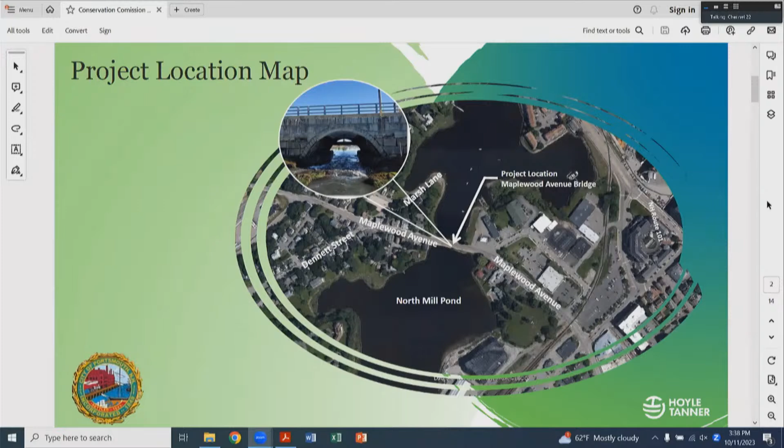Good afternoon. Again, my name is Kimberly Peace, and I'm with Hoyle Tanner and Associates, the design and permitting consultants for this project. If you'll go to the next slide - this is just a location map to orient everyone where the Maplewood Avenue Bridge is. It's oriented north and south, and it crosses the North Mill Pond.

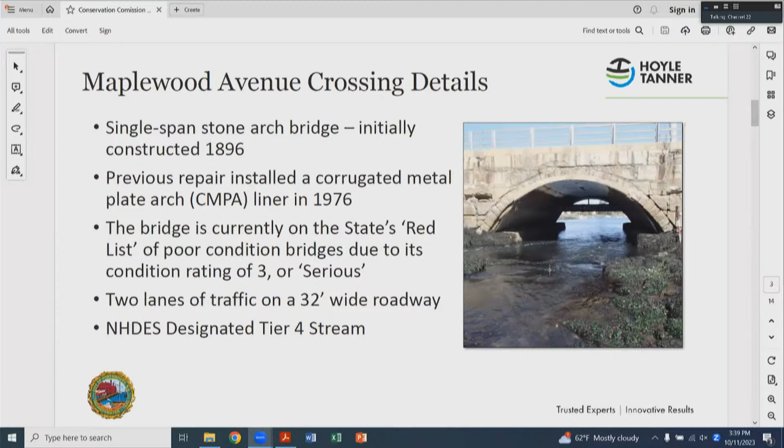Next slide. So a lot of words on here - basically what we're looking at is installing a geopolymer liner, spray applied on the inside of that metal arch. That is going to give some structural stability to the arch, and help that wall become more stabilized so we get some design life out of it. I believe we're talking about a 10 to 15 year design life, at which time we're looking at a complete replacement. So that gives the city some time to find the funding for that.

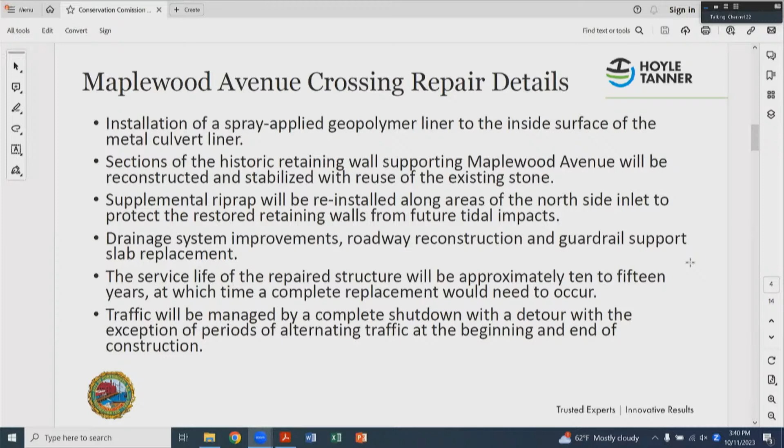There are also some sections of the retaining wall and supplemental riprap that are going to be repaired in order to add to the stability of the structure. So drainage system improvements, guardrail support, slab replacement - if you've been out there, you saw the guardrails are kind of tipped. All of this is in general just a rehabilitation of the structure so we can improve it for the next 10 to 15 years. This is going to be a complete shutdown with a detour, alternating traffic at the beginning and end of the construction periods.

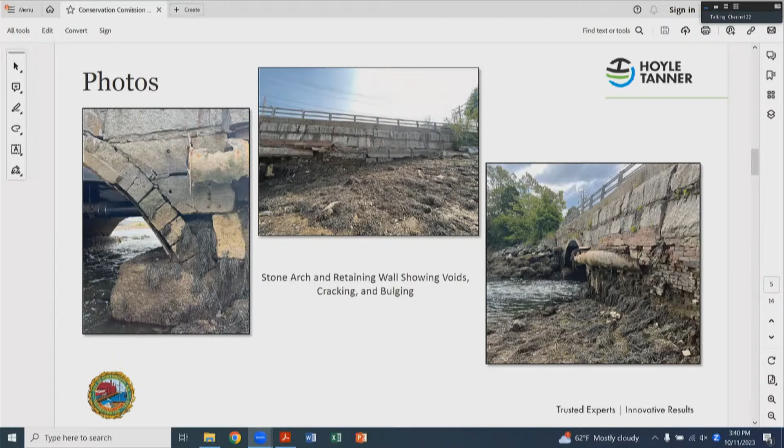Next slide. For some of you that were out there, this is the situation we're looking at in terms of replacement of stone along those areas where the stone has just shifted over time. And then the next slide, the pictures from within the arch, I think tells the story. This is really the repair we're looking at, that the geopolymer liner is going to go over and support, so that this metal plate arch is supported and stabilized.

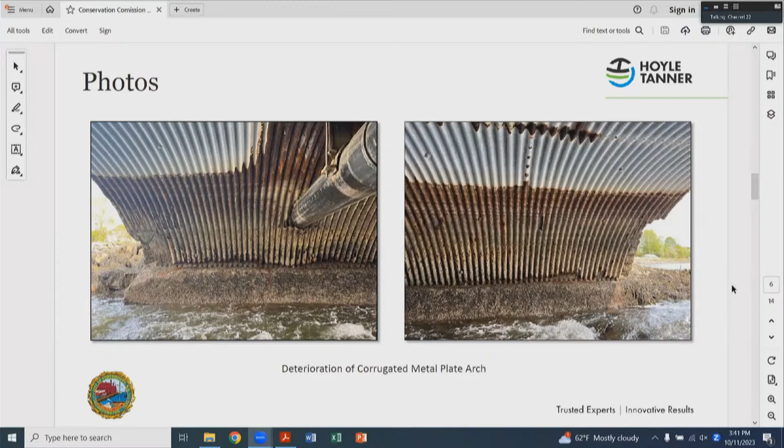In terms of environmental resource review, we did not have state listed species from NHB or Fish and Game, or federally listed northern long-eared bat. We don't have tree removals for this project. There were some invasive species, and they will have to do a control plan for the contractor.

Cultural Resources took a look at the bridge, even though it's structurally an old bridge, because of this work it's not going to have an adverse effect to the structure.

Water quality, erosion and sediment controls will be handled with the contractor. We have applied for a wetland permit from the Army Corps and from the state. We do not need a shoreline permit because the 100-foot tidal buffer zone covers all the work that's going to be done in that zone.

When we look at the impacts that result from this, there is no impact to the floodplain wetlands that will affect flood storage. The liner is going to be sprayed on.

It's going to be 4.5 inches thick within the opening. We discussed this with DES in quite a few different ways in terms of how we calculate that for the hydraulic analysis. We ran the hydraulic analysis several different ways according to our conversations with DES.

Eventually we came to the conclusion that the fill from the liner below the highest observable tide line, HOTL, is approximately 38 square feet. Again, that's looking at the liner, the length, and then the overall arch.

To offset that, we had talked in the field about the footings that the arch currently sits on. Because we're using a different form to strengthen that, we're able to reduce those footings, and that's going to reduce fill below the water, offsetting the fill below the high tide line.

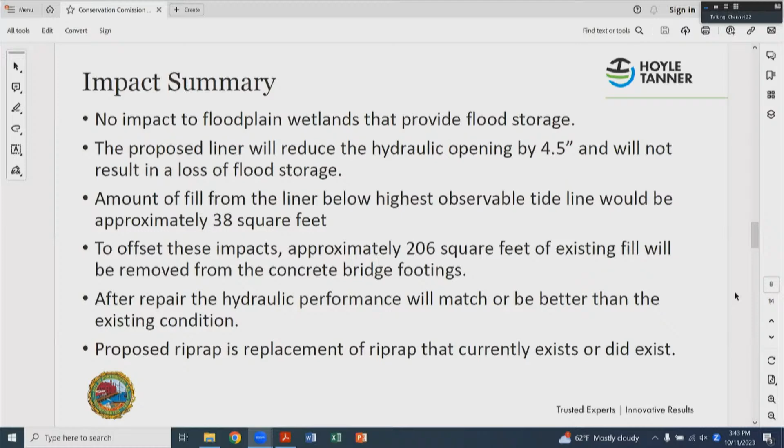If we look at the impact, this is our table showing the impacts. Again, the permanent impacts below the high tide line are 38 square feet. We do have some temporary impacts, some impacts to the tidal buffer zone, and then impacts we calculated for New Hampshire DES versus Army Corps, given the Army Corps doesn't identify the bank areas as an impact.

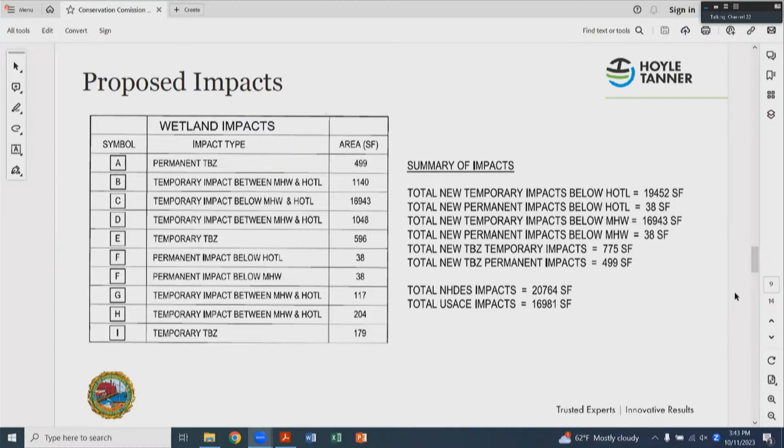If we look at the plan, I think you all have a copy. I know there's a lot on here, so can I walk over there? Am I still mic'd if I walk over there? Is there a laser pointer? Hold the stop button for the pointer. Did I just mess something up? There you go, okay.

So as you can see, there's a lot going on in this, but these pipes that run through here are also included as part of our water diversion.

What we have here is a temporary dewatering situation, called a Porta-dam. It's basically going to dam off the structure except for these two pipes, which will flow through the middle of the bridge and through the crossing.

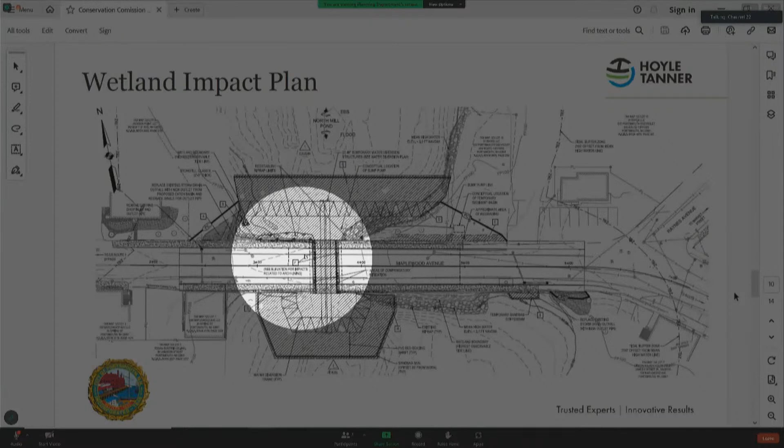So we will continue to have flow, that is a requirement. There will be room on each side of the pipe for the contractors to work in the dry, which is needed in order to spray on the liner.

I know there was discussion about this in the field. We certainly recognize that this is not going to be a perfect scenario. These are the biggest pipes we can fit through the crossing and still have room on each side for the contractor to work. We looked at this several different ways, and this is the best possible scenario to keep aquatic flow and passage through the pipes while still getting the work done in the shortest amount of time.

So again, we were balancing the impacts of restricting tidal flow versus getting the work done, and this is our proposition. We talked to DES about this dewatering plan, and this is the plan we have come up with to date.

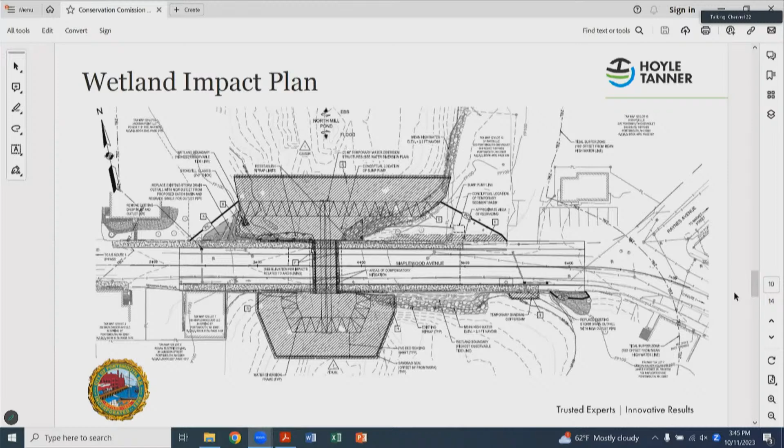And then if you look at the next slide, we were showing more details of the water diversion plan highlighted, and you can see the cross section there. Again, those will be the water bypass pipes that will go through and allow tidal flow to be unrestricted. So I think that's the last slide.

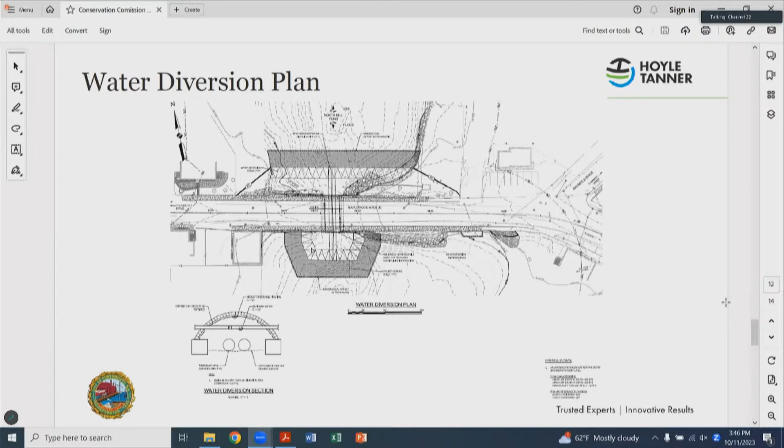Questions, Allison? So just to get the picture correct in my head - here's the bridge, you've got dams on either side to keep this dry in here, and the two liner pipes are going to be through the dam on the other side of the dam. Correct? Okay, yes.

I'm just concerned that we've had 100-year storms recently, and I'm wondering if there would be any possibility of breaching the dams when we have another storm. The fact that this goes into North Mill Pond and then outlets again so close to the Piscataqua River, the tidal influence has much more water level change than the 100-year storm. Although that was analyzed when we did the hydraulic analysis, and the pipes we have proposed aren't anticipated to exceed their carrying capacity because North Mill Pond has such a capacity to hold more stormwater.

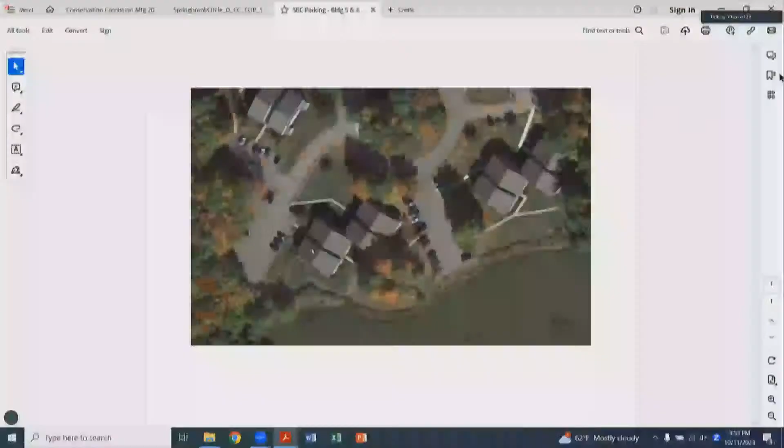So I know we met last week and talked about the proposed project, but what we're proposing is - I don't know, will a regular laser pointer work? I don't know, let's try it. I don't think so, it's not visible to people online anyway. Oh, okay, alright, then we'll do this.

So this particular parking lot here, which lies between building 6 here and building 5 there, has walkways that connect 20 condo units to it. Our condominium docs allow up to 2 vehicles per unit, so that would be 40 cars. This particular parking lot, as constructed, can accommodate somewhere between 26 and 28 spaces. So we don't have sufficient parking to accommodate the units that are connected to it.

This is what I would consider the worst location on the property in terms of not having sufficient parking capacity, and we frequently get comments from unit owners regarding that. So what we were planning to do is use this parking lot over here, which we consider an overflow lot - it's only accessed by 8 condos, and there's always plenty of parking available in this lot.

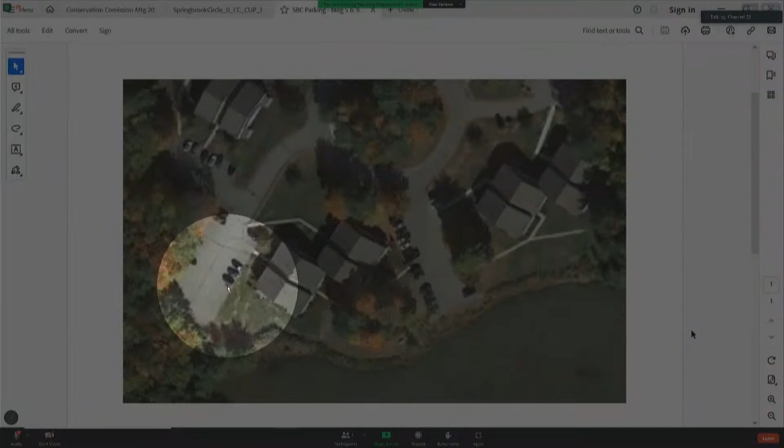Questions? Yeah, Allison. I know when we were out on the site walk that I had mentioned this, and I still think it's a better alternative rather than having the new sidewalk join right at the conjunction of the walk that comes from those first 4 units and connects out to where the walkway goes to the parking lot that you're referring to.

Have it go sort of 8 feet from where that corner is, and the reason for that is that if you expect those people from the units in the lower right-hand corner to use the parking lot behind them, I think that you should move the walkway closer to them.

Otherwise, you're just going to get people walking across the lawn to get to where they need to go, and I think it would just be more convenient for them and allow them to use it more freely. Sure, there's a lot of flexibility there, and I think I can speak for the board that we're very flexible in terms of where that walkway attaches to the existing walkway, and that sounds like a good suggestion.

I think it would just be better utilized. If we could go back to the other slide, I think it would make your point better. I'm David Wade, sorry. We would cut the... yeah, this one, no, the other one. No, down. So that's the same drawing with less detail, but right.

We want to develop and identify a proper wetland buffer management plan for here. I think we talked about how we've got about 10% of that pond bank historically maintained to preserve visual access to the pond. We don't allow any recreation activities on there, just visual access. That was feedback we got many years ago from folks who live there and look out towards the pond.

So we are going to be developing some type of plan, which I imagine will involve removal of invasive species and installation of native plants, and it'll be subsequently part of our landscape contract. But that's down the road, that's not anything I can promise. We have a board, we have to present it, it has to be approved. But with respect to this project, if there are particular plants or a particular location the commission would be interested in seeing, I think we're certainly open to that.

I don't really have a concept of what the ask is or what the desire would be in that location. But again, I think we're certainly open. I know we talked about this recently, that the maintenance along here kind of got slack.

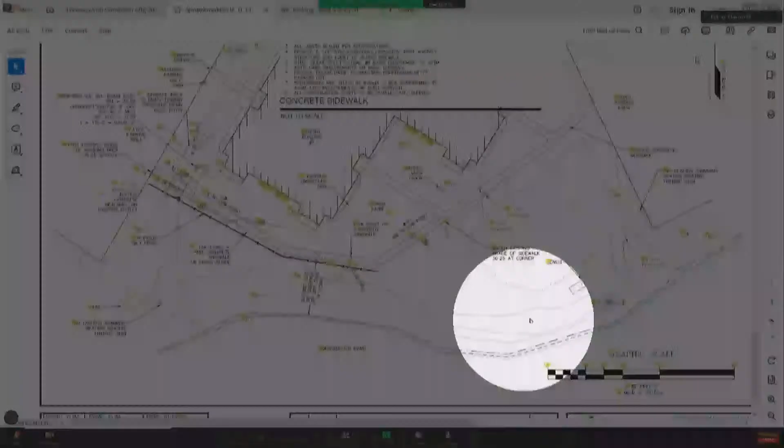I don't think it's going to happen that quickly. But I certainly can tell you that we are motivated to work with you folks and come up with some type of plan that's approvable, that we can capture in writing, and not just the establishment of it, but then the maintenance of it annually in terms of what that's going to entail.

We're hoping to meet before summer so that we can have that plan approved and go ahead and start. When you're speaking, sir, would you mind being in front of the microphone? Oh, sorry.

Our plan is to meet with the landscaper and perhaps the landscape designer to come up with a plan for that whole area we're discussing now. But that's something we hadn't planned on as far as putting the sidewalk in. This is something else that's going to run along with it. Kate and Peter, we're going to be working with them trying to set that up.

Thank you. So I didn't know if Kate or Peter... because it would sort of be conditional, in my mind, on this permit being conditional on them doing plantings on the buffer to offset. I don't think that's a bad idea, to offset the impacts of maybe the new impervious surface here.

I think we are hoping to do a separate restoration plan with these guys, just because it will take a few months at least to get it together and make sure we all approve of it when it's finalized. But for this, maybe just addressing the impacts of the sidewalk here, and addressing the Phragmites and enforcement issues in the restoration plan separately, might be the best way to go about this. I don't know what others think.

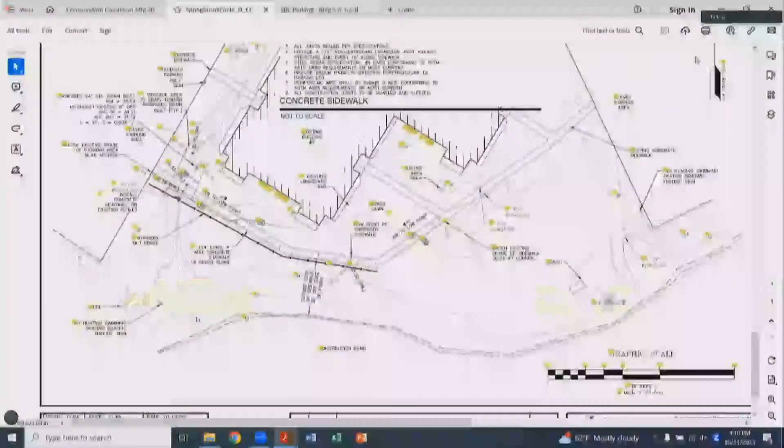For me, that area in particular could really use some stabilization and some plants. But is that kind of what you're thinking? That's what I was thinking, and we talked about blueberries.

Yeah, the only thing I'd be concerned about is that if they're actually going to do a restoration plan and remove any of that Phragmites, they're probably going to have to get a piece of equipment out there to dig deep enough to get rid of it. And if you've got other plants in that area, they'll probably be ruined.

So it's better, I think, to hold off for the restoration plan, with the understanding that it's going to include buffer plantings. Personally, I mean... No, I mean, that also makes sense. You don't want to undo what you did.

Yeah, as long as we have sort of jurisdiction making sure they do a planting, because right now we're giving them a conditional use permit. Yeah, I totally think that makes sense, but do we have that clout, or whatever, later on? We could stipulate that they follow through on the restoration plan within the year.

And that the restoration plan includes buffer plantings. Yeah, sounds good. Does that sound good?

It sounded good, but I want to make sure I understood what I heard. So maybe someone could clarify. Sure, so...

You talked with Peter and Kate about a potential restoration plan. And what we're suggesting is that you not put additional plants in the buffer until that plan is completed, but that additional plants will be put in the buffer as part of that restoration plan. This conditional use permit will have that as a stipulation, that within the year the restoration plan should be completed.

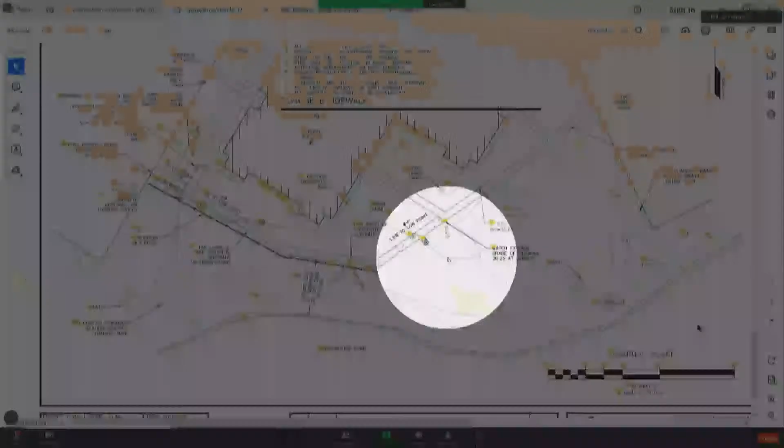One other question or suggestion I have is your silt fence, I think, should extend farther beyond where it ends there at that turn of the new sidewalk. I think it ends right here. And you want to extend it to the tree line? I don't know how far, if anyone has any suggestions on the commission, but I think it's ending a little short, prematurely. Yeah, I think extending it to the tree line is extending it to the reasonable tree line, okay.

Yeah, I think the idea with the silt fence is to make sure that it covers all the construction before it starts, all the construction sediment before it starts going towards the pond. So extending it at least to where you're still putting in the new sidewalk where it's joining, those two would be.

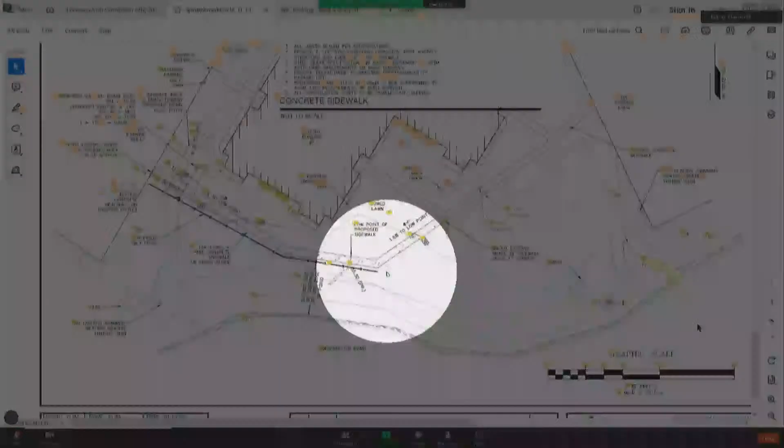Yeah, so I think somewhere around here, slightly beyond. Now, if this walkway gets moved back here, then we could probably just bring the silt fence to here, and that would probably be a good termination point. Yeah, I think so. I think at that point, you're far enough away from the wetland.

Yeah, I can't speak for the engineers. I'm not sure why they ended it there when they designed it. I know it's fairly flat here, where here it's sloped, but I don't see any harm in extending this further. It just helps give a boundary, to ensure everything's captured. Any other questions?

Someone want to make a motion? I'll add one more question. Yeah, sorry, no, go ahead.

So the area where you were talking about doing a planting plan, that area is all grass and it's really green grass. I don't know if you're aware that you should have in your contract for your maintenance landscaper not to use fertilizer within the buffer. We're also asking applicants to agree to follow NOFA standards - Northeast Organic Farming Association. We have some write-ups on that we can send you, they're on the website too.

That's for the buffer zone you're talking about, yeah, definitely for the buffer zone. It's within 75 feet, no fertilizer - is that right? Gosh, now I can't remember. I think it's actually less. Yeah, it's low nitrogen, low phosphate fertilizer. Within 75, or was it 50? I'm not sure there was a limit, not sure what the number was. Okay, but that document's referenceable. Make sure you have it, that's an easy thing to comply with, we can easily specify that in the landscape.

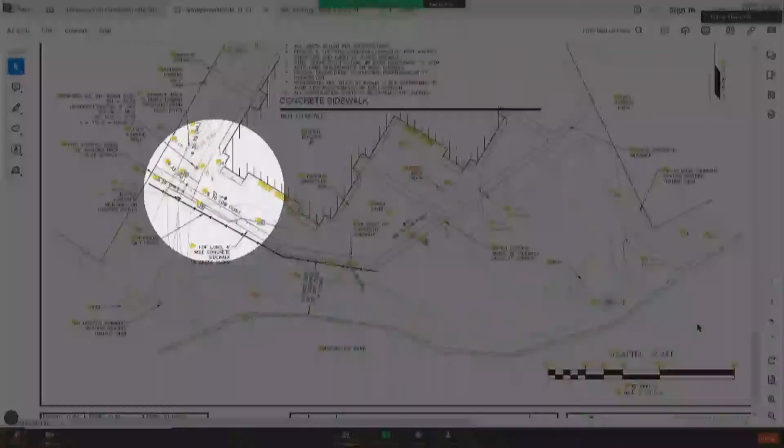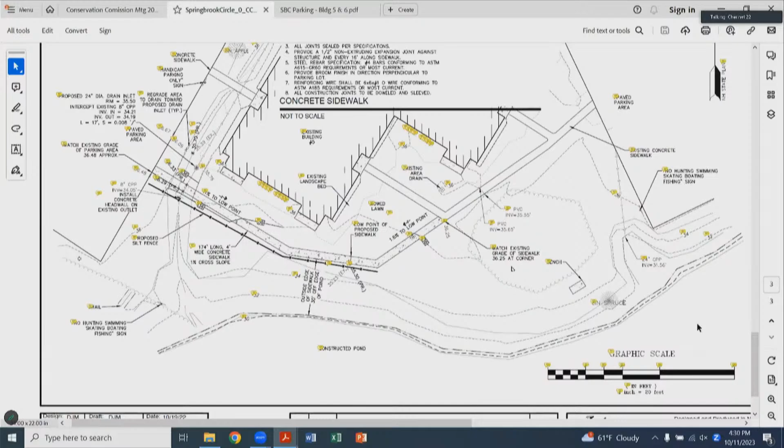So just to kind of recap, I think there are four suggestions: one is move the walkway back a little bit, maybe 8 feet. Pipe bollards, downward illuminating, to illuminate the walkway. No fertilizer within whatever is specified in the document the city has, and the development of a wetlands buffer restoration plan and maintenance plan. I think I have two more, but I'll let you stipulate.

Okay, I'm just going to get my pen out to start writing this stuff down. You'll have it all in writing too once we make a motion. Are you going to go? Yeah, I was going to make a motion, but if you don't want me to... I don't know if, because in the recommendations from the city it was to do the placards or whatever, I have that down here too. I have two more also. Okay, who wants to try?

Okay, I'll make a motion to recommend approval to the planning board of this application with the following stipulations: that buffer markers are installed that can be purchased from the planning department; that no salt signs be installed; that the walkway is moved 8 feet from the current intersection toward the buildings; that you keep the walkway at a minimum width up to 5 feet; that you extend the silt fence to the tree line, or wherever the sidewalk is going in - if you move it in 8 feet, then it goes to where that intersection would be; that you install downlighting along the path, and that you follow through on the restoration plan and increase plants in the buffer within a year. And then, not a stipulation, but we would recommend that you use a Green Snow Pro certified vendor for winter maintenance.

There's a larger piece of land up top, which we're looking to remain undeveloped at this time. It is home to an existing antenna that has rights here. There was an existing antenna in this location, which was taken down in the past few months. The existing WHEB radio station building is approximately in this location, coming right out to basically the top of the bank. So the site development area itself really is about 5 acres, bound by Lafayette Road, the Lafayette Plaza, the salt marsh along the creek, and the land above.

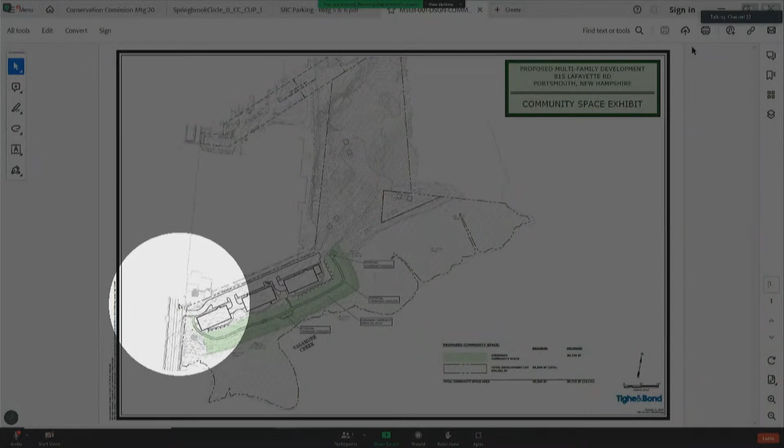So the driveway entry coming in off the site is going to remain in the same location. We've situated these 3 buildings set back outside of the 100-foot buffer, and in addition, some of the amenity space areas and sidewalk connectors along the rears of these buildings as well. There will be parking along the face of these buildings, essentially in existing paved areas. To reduce impervious surface on the site, we are putting parking on the first level of these apartment buildings. They're 4-story apartment buildings. First story will be parking with 3 floors of units above.

Thanks, Kate. So that's kind of the overview of the project itself. From the community space standpoint, we met with the Technical Advisory Committee last month also for a work session to seek some feedback. The initial package that was submitted to both them and you folks had a different proposal for the community space, which I think we discussed last week. But at TAC, we received some feedback that there may be challenges pursuing the proposal that we had set forth, that it had included the salt marsh area in it as part of the community space, which was some good feedback that we'd gotten from staff. So we went back to the drawing board in advance of meeting with you folks on site last week and this work session to come up with an alternative for a community space proposal.

What we're looking to do along the water's edge is a greenway. You can see here in green that proposed area, which is basically the entire 100-foot buffer along the rear of those buildings between the creek. We're proposing to put into community space.

Essentially, that would put that into conservation. There would be no development that could occur within that area. We are proposing within that to create this greenway, what would be a passive path, probably a wood chip trail.

I'm very much here to listen to feedback from you folks on the trail itself and what we should be doing within that buffer. Initially the thought is some selective invasive species removal, obviously trying to maintain well-established vegetation, but I'm open to any feedback relative to that.

So the trail itself would come down, and as drawn here, very preliminarily, it's kind of following that 50-foot buffer line. We do have a small outlook that we've identified here. You'll recall when we did the site walk, this is actually that rear parking lot where the building comes down right to the bank, so this area is already highly disturbed. There's actually all pavement in here.

In addition, there's also a septic system in here that currently services that building. We're removing that septic system as part of this project. This project will be on sewer, which will be an environmental benefit.

So we've tried to situate that outlook in a manner that would give some views of the creek, and then coming along similarly, just following that buffer. Another potential outlook here is as the land kind of jogs in, you can see the line of the salt marsh and the bank here.

From a stormwater management standpoint, right now the site, the way it is, it all just sheet flows directly into Sagamore Creek without any sort of treatment whatsoever. We are proposing advanced stormwater treatment, which is a requirement of the City of Portsmouth, and alteration of terrain, which this project will require both permits for. So we'd be treating it with a combination of best management practices.

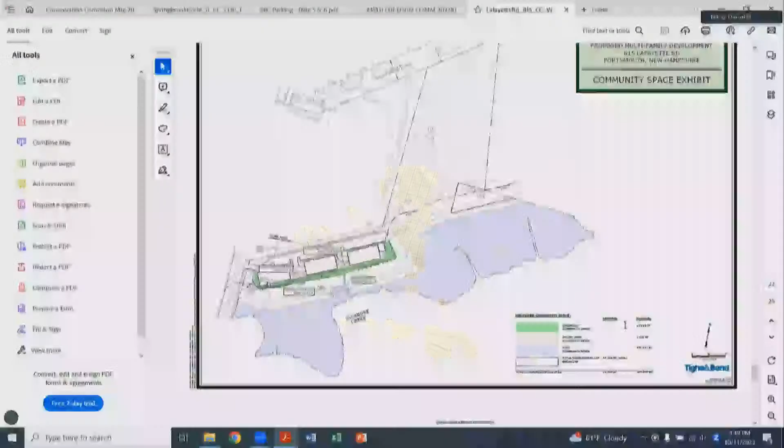We had shown, that's the buffer impact exhibit - we had shown potentially utilizing what we're now showing as the walkway amenity area around the building. We weren't particularly crazy about it because of concerns with privacy and the public being able to come in around these buildings. So we took the feedback, particularly with respect to the salt marsh and the concerns with putting the public right along the rears of these buildings.

We don't want the peeping Toms, the people out there. We really wanted to create a separation, so it worked to a benefit in both ways, in that we were able to come up with this alternative proposal, which, rather than putting what would essentially already be a conservation area, since you can't build in that salt marsh, taking the community space and putting it on the buffer to restrict any further development in the buffer along the creek.

Thank you. Can I follow up on that? So you had to have more community space based on their feedback? We didn't have to have more - we actually had, just because of the sheer size of the salt marsh, more than enough. But we were looking at opportunities to find larger land areas because we're calculating it against 20 acres rather than the 5 acres of site development area.

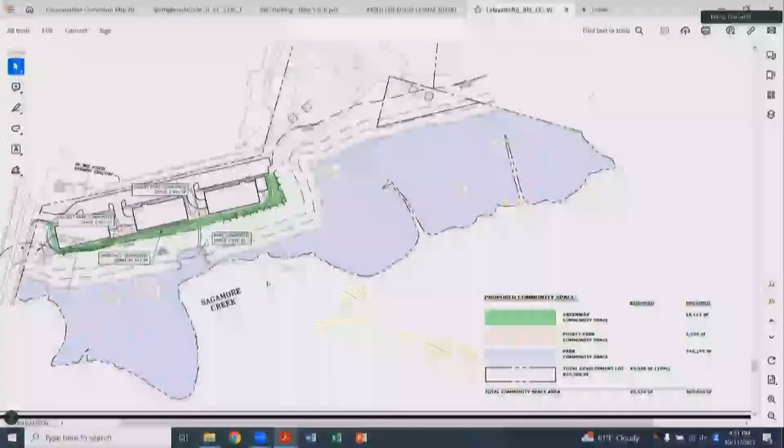And the salt marsh here - is that going to be considered community space? It is not going to be considered community space. That's why I think this gravel section, this is old, we're not pursuing this. I get that, but I guess it was going to be community space. We were - I mean, you can see the number there, it's about 350,000 square feet, plus or minus.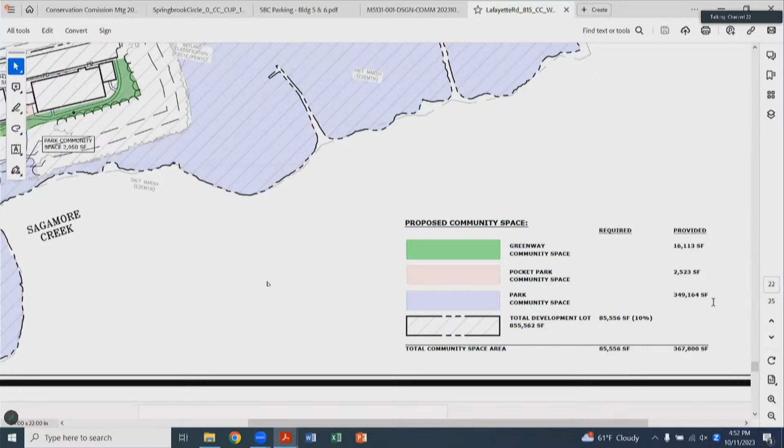I think that included a small path that walked up and connected, down in the legend - I'm trying to read it from here - I think that says like 340-something thousand square feet. 349. That's all part of the parcel, the salt marsh. It's all considered part of the property. But it wasn't - I mean, just sort of what I'm getting at is, unless the salt marsh is all community space, my interpretation of what you have here is this is less impact on the natural resource than what you're coming to us with now.

Well, we're looking to just do a passive trail. We're not looking to have anything more than a wood chip trail - we don't want to have any sort of paved impacts within that greenway.

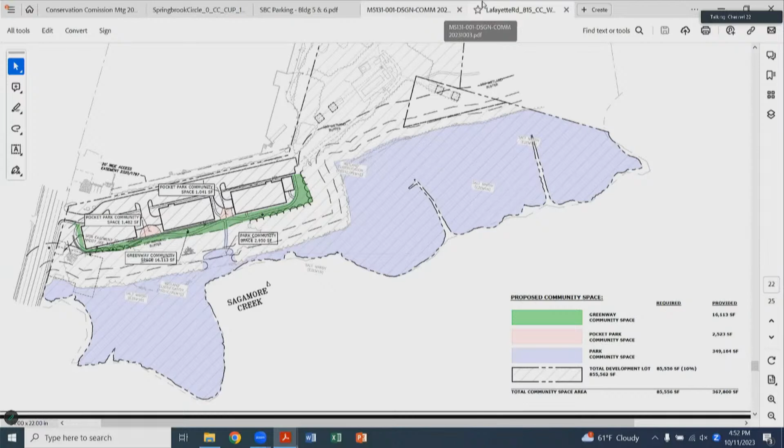So would you come to us with a full proposal that would include where that trail is going to go? Yes - you'll walk it, could you take us on that trail where you think it would go? We will have to probably tag it. To the exact extent, we'll probably have to notate the plans to a point that we're not removing trees, we're meandering the trails, but we're not bringing it any closer than a certain distance. That's what we have to work through in the next couple of weeks as part of our proposal.

We are going out tomorrow, in fact, mapping the invasive species themselves so that we'll have a better idea of where we're going to actually get in and remove that.

It's just that I'm sort of interpreting this all as an advantage to the property, for sure - like if you're going to own or rent here, you're going to have this nice natural resource that you can access a little bit. But not really a community space. Well, that's the way the zoning is written, unfortunately.

Right, so we're just trying to work within the parameters, not disturbing that area on the upland. And so that would be, to me, the community space. Yeah, but I don't know that the public's going to - well, we had proposed it and it was very preliminary. We had concerns with what we showed, bringing it up along the back edge of this building. I think you mean where the antenna is, right, Barbara? That upland? Yeah, that upland, up here.

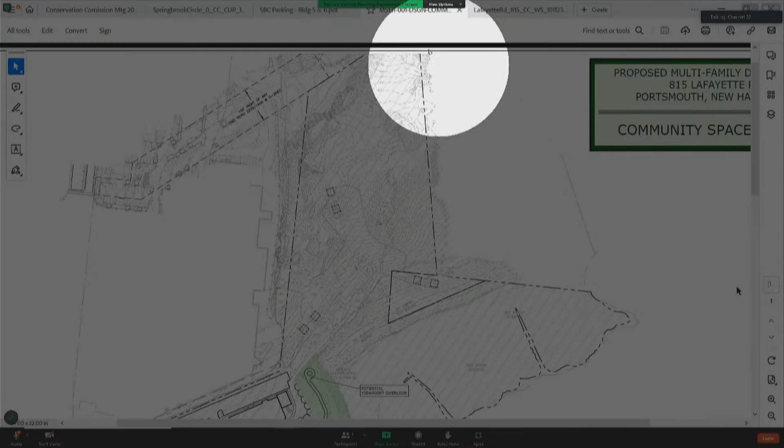I think that would be a larger discussion. We're not opposed to that larger discussion, we just don't want the project to be tied down with that because of the concerns we have with it. Yeah, and I'm just nervous about going forward without that larger discussion - we'll have more impact to the natural resource and we're not really going to gain much as a community.

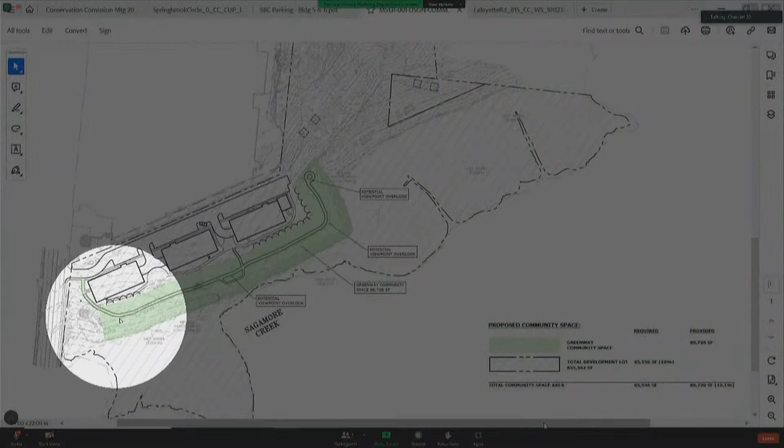And that area, you're near Crossroads House. That area is mostly, a lot of people that travel that area are just not the people that are going to recreate out there the way you think they will. Where this is getting developed and we'll have people occupying it, we're less concerned, and it will be monitored. We'll be less concerned with this area. It up here is certainly a concern.

Bringing the public up into this piece of land that is not developed yet, is rocky, it's wooded, it has antennas. We're trying not to invite the public up there at this point.

I understand the larger vision of creating this connection that can ultimately get up over to the high school. But where we're not proposing to do anything up here, we were trying to just keep this proposal to this area. Essentially, this could be that first section of what would potentially be something in the future. I hesitate to draw a path from here connecting to this because we're inviting the public to trespass.

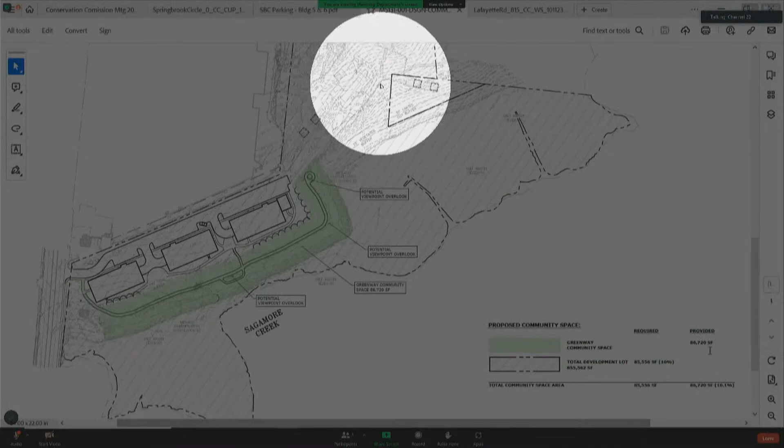Right, well there's easements though. I think we did talk about that. No, I'm talking on the adjacent parcel. We don't have rights to that, so we would be inviting the public to cross our parcel and go into private property. Signage could be put up and things like that.

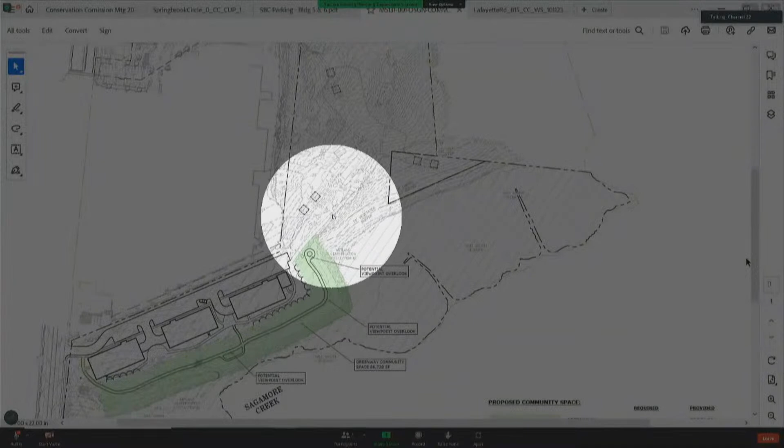I understand it's heading in that direction. I guess if we're putting signage up to prevent them from going onto private property here, why would we want to continue this up here where we're bringing people into an area that is potentially not safe for the public because of the homeless issue and also because of all these antennas, wires and rocks. I don't know if we're going to stop it here - I'd rather just stop it here. I'm happy to show a dashed line on the plan that says potential future connection, but we're just not looking to do that as part of this project.

Mike Brown, one of the owners of the property. Since you guys have been out there last week, there's a couple more tents, and it's been an ongoing issue for us to keep it safe out there.

Our concern is that we're going to open this up to a bigger problem that's currently going on. The Portsmouth Police Department has been awesome about taking care of it. We've been up there several times cleaning up needles and different types of things. In fact, some of the people that work for me have dogs and walk through there, and we understand the need for making it so people can walk through there, but we've been trying to keep it safe.

There's a lot of other things that people want to talk about or don't want to talk about that go on up there. So we have a big concern that we could be opening this up to a potential bigger problem like Peirce Island and other things. So we'd like to keep it down in the lower section until we come up with, if we even ever do anything up top. I just wanted to let you guys know that there's more encampment already just in a week. Thank you.

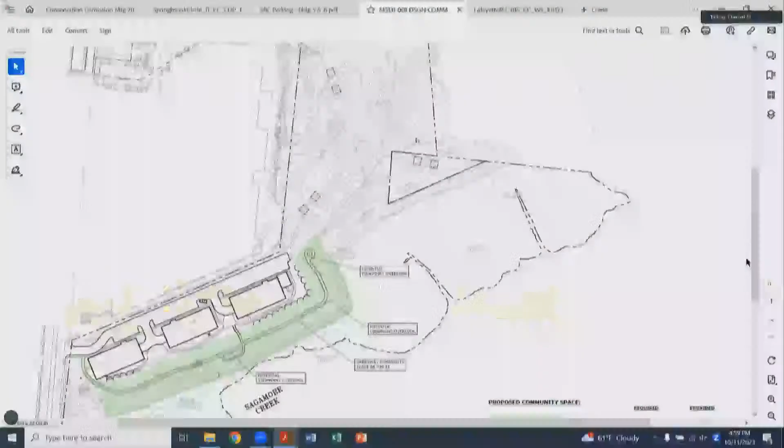Patrick, is that the currently shaded green? Does that just get you 10%? Is that a little bit in excess of 10%? It is - it's 10.1%. 10.1%, okay.

All right, which is honestly just how it worked out. We shaded the whole buffer. The only green that we don't have shaded is where the NHDOT has a drainage easement along the front of the road. We don't have rights to it, so.

Well, I appreciate it. I think that area could be all considered community, because we're leaving the plants there for the community. They're not going to tear everything down and put something else back. It's going to be left as natural as possible, and I think that's because it's community space. If it were for the apartments, it might look different. But as the regulations are written, they can't really do anything down there anyway. And plus, this is shoreland property too, so they're limited on what they can do, even path-wise, because it's shoreland under those regulations. So I feel like it's sort of like we can't use it, but we'll call it community space.

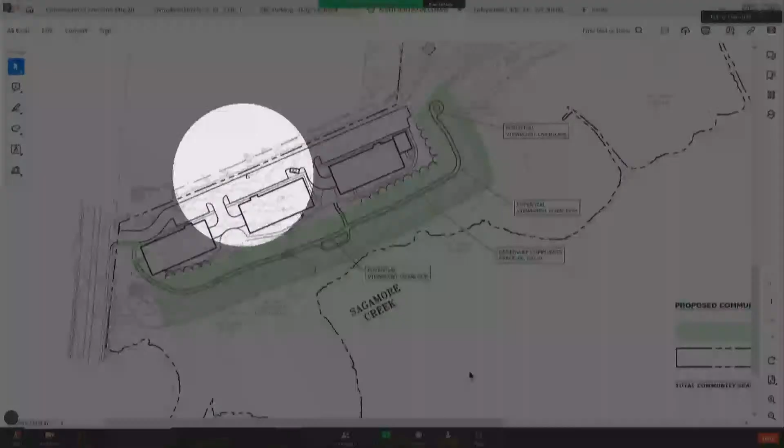Okay, yeah, that'll improve the aesthetics too, I'm sure. Yeah, to like get that good. Yep. Okay.